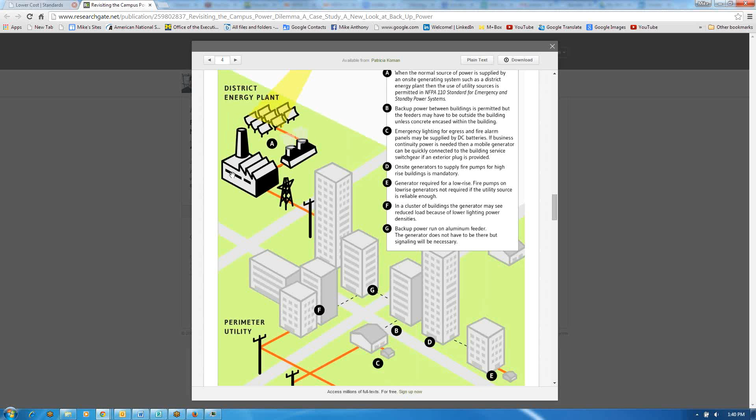Well, yeah, this is a drawing that we produced for the District Energy Association, and the point we try to make here is that when you have a district energy plant like this and you are identified by the authority having jurisdiction that this is your primary source of power and it's sufficiently reliable to be your primary source of power, and you find yourself nested within a utility, and I call it the perimeter utility here, you can use the perimeter utility as your backup source.

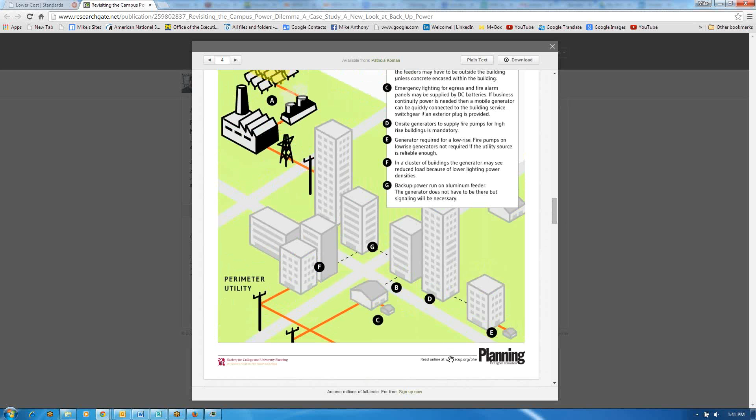Now, why is that important? That's one important point, because very often the 3 or 4 nines of availability is important for both of these power sources. But more importantly, what I'm driving at here is that here's a generator to a building. The feeders coming out of this generator could go to more buildings farther out.

We actually built one of these here in Ann Arbor. We have several thousand feet, 1,000 foot, 2,000 foot aluminum feeders. They're not normally used. They're 100 amp feeders, but we were able to consolidate power to 4 buildings with one generator here. One generator is feeding 4 buildings because using aluminum made it much cheaper.

In many cases, just getting the wire to the buildings is the prohibitive cost. This generator here is fairly well bid. It's a piece of equipment that's built off-site, and the optimal price has been fairly well discovered. What is not discovered is how much it's going to cost contractors to run feeders to all these places. So our solution has always been, let's just put a generator at every building.

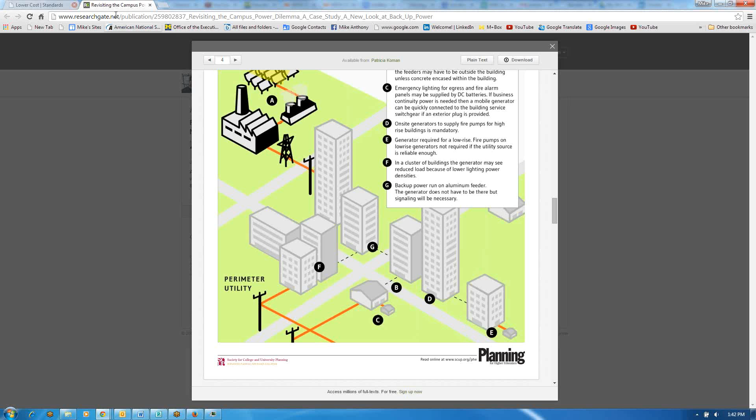So you wouldn't think the fact that aluminum feeders are 1/3 the cost of copper feeders would have an effect on greenhouse gases, but it does. It also reduces your ongoing maintenance and testing, because with generators you have to test them on a schedule. So now instead of having 4 or 5 different generators that you have to maintain and test, you have one.

Yeah. There is a condition. You're going to want your control wiring to be adequate. And there are some restrictions upon how you run your feeder through the building, but suffice to say that the cost of running power now to all these buildings that we showed you on our figure there is now 1/3 the cost.

So you can consolidate feeders. You can consolidate feeders to buildings, and so that's one of the unexpected benefits of the price difference of aluminum. So I wanted to bring that dimension in here, because it's not always known, and it is significant in an environment where we're all trying to reduce our greenhouse gases. So that's very cool.

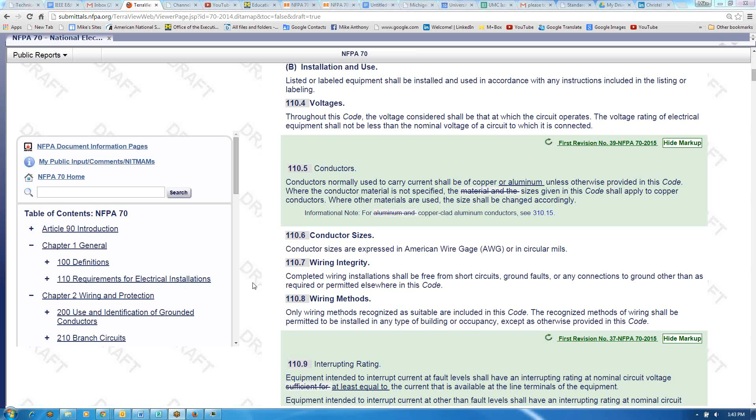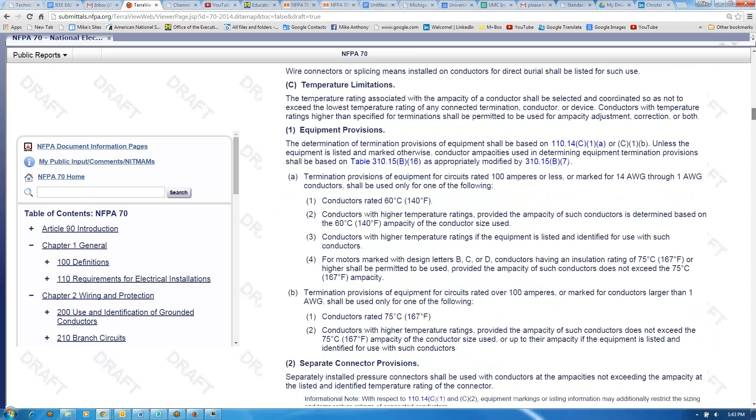Okay, so where should we travel to next, Christel? 110.14(D). So just a little bit farther along, and this will be our last one in Article 110. If you come down to the new D right there. Okay, this is another one that Pete Pollack actually started the ball rolling on.

The new 110.14(D) gives explicit instruction to code users that if you have a termination or a connection that has a stated torque value, then you will use a calibrated torque tool. We've talked about this for years, and the contention has always been that 110.3(B), which requires that you install equipment in accordance with its listing and labeling, would require you to use a torque tool in any case. But that's not the way it has been interpreted in the field.

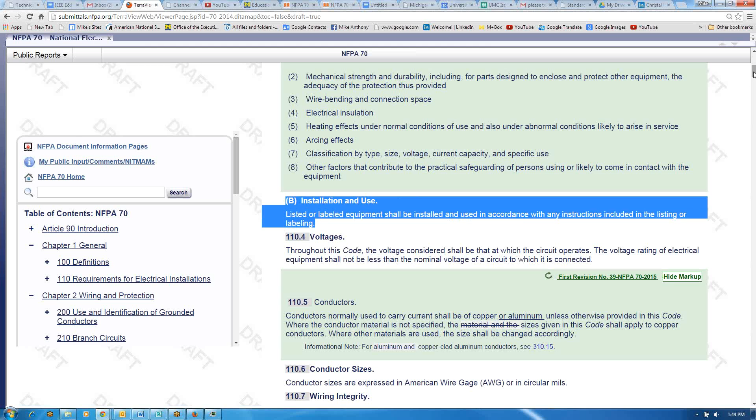So as code users, we know that 110.3(B) is right there. Very simple statement. If you've got a piece of equipment, you install it the way it's intended to be installed. But the normal electrician out in the field, when they read that language, they're not thinking about using a torque tool for, say, a set screw connection. So adding this language explicitly into 110.14 makes it very clear that if you have a torque value on a connection, you have to use a calibrated torque tool to make that connection.

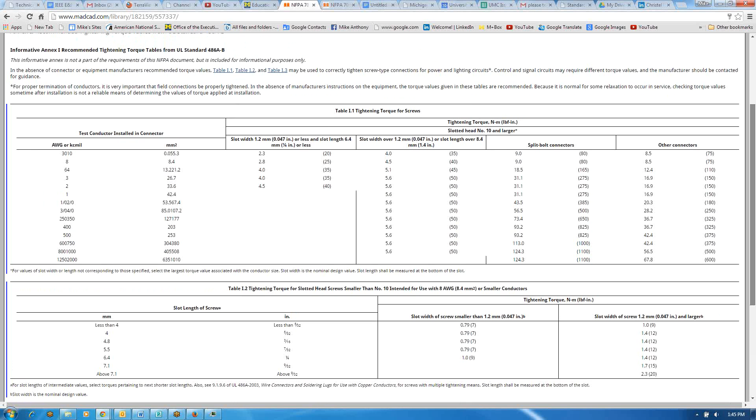And Mike, you've seen the testing that my colleagues and I have done over the last few years. We've gone to trade shows and all kinds of events with electricians, inspectors and some engineers. We did a field study to see how well electricians could terminate a connection without using a torque wrench. And the results were horrible. 1 in 4 got anywhere close, and we gave a wide range.

We gave plus or minus 20% of the recommended torque value, and only 1 in 4 could even get within that. The surprising thing to the electricians is that most of them were below the recommended torque value. 56% were below, and 30% of those connections were less than half of the recommended torque value. And I know from working with connector manufacturers that if you don't tighten that connection to the recommended torque, it will have a much shorter lifetime than intended.

So encouraging the culture of correct installation by using torque tools will decrease failures at connections, decrease overheated connections, and decrease fires over time once this begins to be enforced. And just real quick, there are some jurisdictions that already enforce this using 110.3(B), but they're few and far between.

So we're collecting case studies from those jurisdictions to find out how they enforce it, to kind of give options to other jurisdictions where this will be a new requirement.

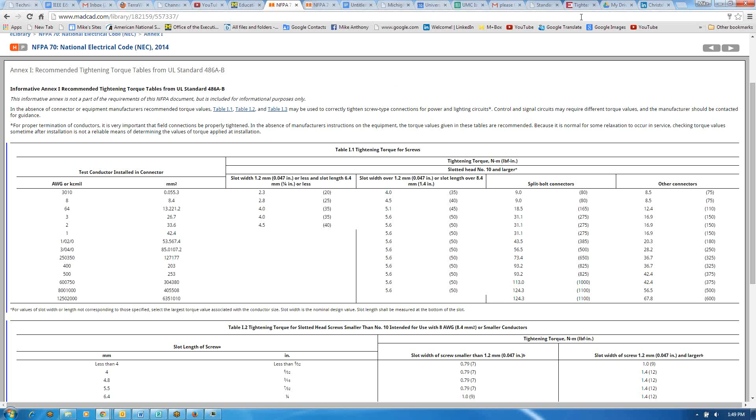Yeah, in places like the U of M Stadium, some of these buildings have tens of thousands. You figure every circuit has 2 ends, and you've got 3 phases, and you've got your ground, and you've got a neutral in there, so when you talk about tens of thousands of terminations that could likely fail like this, it's a fairly serious business. So, yeah.

Okay, let's get ourselves back to Terra. Where are we going to next? Let's go to 250.120(B). I love Article 250. It's better than Ambien. Let's see, what is it? 250 what? 120. 250.120.

I don't know. I sat in part of the Code Making Panel 5 meetings, and I found it fascinating. I think grounding and bonding, as much as it can be confusing, it's very intricate if you look at how the system parts interact. So. Oh yeah, but I'm a geek, so. I do get that. What I mean to say is, if it weren't so detailed, I would be bored. I sort of think all this is settled science, and it's always a surprise here that it actually isn't.

And for the record, Elliot, I always vote neutral, or I abstain from Elliot Rappaport's proposals to change globally everything from grounding to bonding as a professional courtesy. It usually doesn't go in his direction, but Elliot, we love you, and I never vote against you. I always abstain. Just for those of you who don't know, Elliot Rappaport's kind of like one of the unimpeachable experts in the grounding and bonding space, let's put it that way.

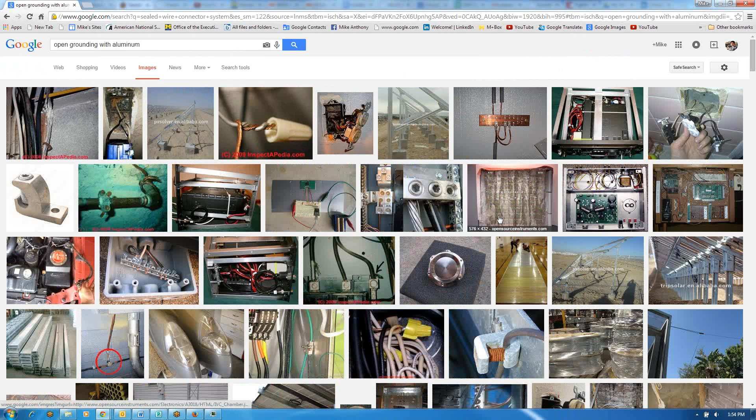Are there any pictures here that describe that? I'm looking for something and I'm struggling. Is something here? That's not exactly it. Can you see this? No. There are connections out there that have like a splice kit, and then they have like a gel covering that goes over it, but I don't see any on these photos. I probably have to send it to you. I know there are several companies that make them. I think 3M makes several. Can you give me another couple of search terms and we can look at that? Go look for 3M gel underground.

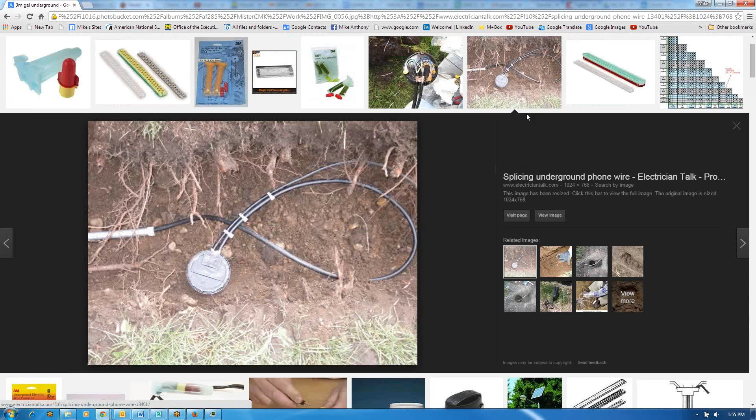So see the one that says Scotchcast. I can't really tell. Oh, there are several on here that might be, but basically you're going to see a connection, and then it has a cover. And here is a resin joint, low voltage armored cable. That's phone wire. Would you like me to search on? I'll try one more time. Okay. Resin wire. Give me another search term. Try 3M aluminum underground.

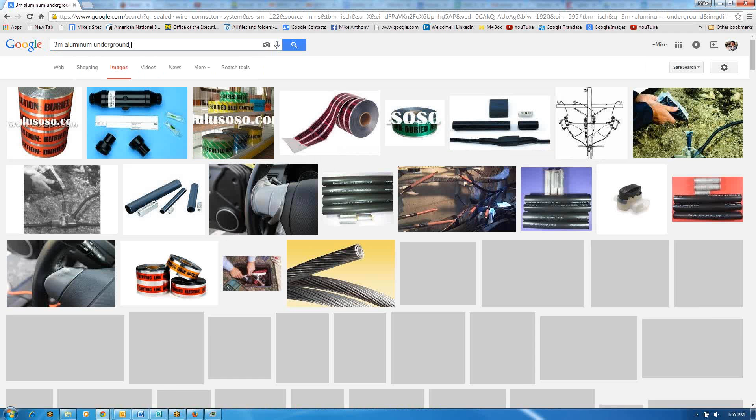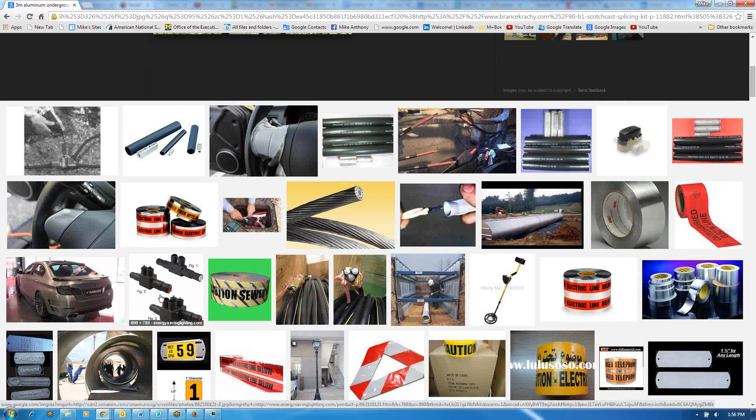Okay, see down there at the bottom, that's a good splicing kit, the picture you're showing now, and the row below that has one as well. Right here? Actually, see the second one over, actually there are quite a few here, I think that's one, it has like a shrink wrap, but I don't think that's gel. Oh, here you go. See where the car is? Go to the one right next to it.

I'm going to give you control of the... Okay, so you can give us a tour here. Yeah, it's kind of hard when we're in different rooms going, oh, that one. Okay, so you should be able to wiggle your mouse around and take us to the right picture. Come on.

It's not clicking on it for some reason. I can see my mouse moving, but I still don't have control. Let me try. Let me look again here. Crystal, I'm going to give us all control and try that. Okay. Go to the far right. Go to the far right. Can you do that there? No? Okay. Well, we may not be able to do that in this mode.

So regardless, I think we get your point. If you see where you see the car, and then there's some connections, and then there's a tape roll that says something sewer, the picture in between where it says Figure 1, Figure 2, and Figure 3 is a good example of an underground splice. Can you see my mouse running right now? No, but you see where the car is, the back of the car? It says, like, the license plate has come on or something like that. So we really are looking at a different screen here. Okay. All right, so we did our due diligence here to let everybody see what we're talking about.

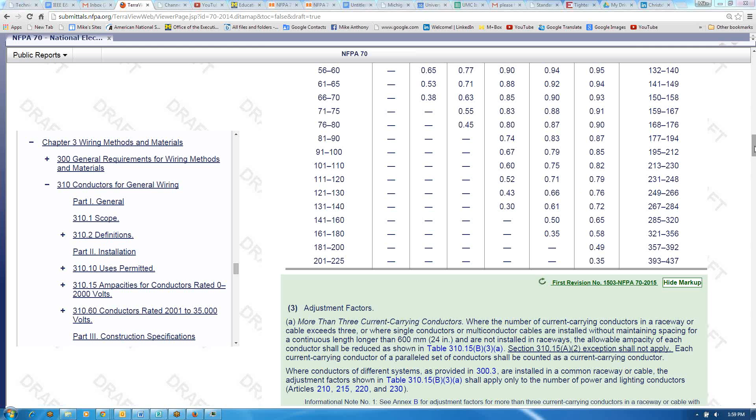So move up just a little bit so that we can see all of the green area. That's good right there. I'm going to unzoom this because I had it zoomed a bit. Okay. So we can come down a little bit. Here we go, right here. So if we look at C, right in the middle of the screen.

So what happened is there was a lot of controversy about the temperature adders for rooftop installations in the 2011 and 2014 code cycles. So Code Making Panel 6 requested an independent task group appointed by the correlating committee to evaluate the information that had been submitted before and come up with a recommendation for the code making panel, which they did. They enlisted the help of heat transfer specialists, professors at multiple universities. They included representatives from labor, from testing labs, engineering representatives, and the recommendation they came up with is that we actually don't need all of the rooftop adders that we have in 310.15(B)(3)(c).

If you look at the table where it says distance above roof to bottom of raceway or cable, what they found is that the only time you might need an adder is if the wiring method is in direct contact with the roof. So typically if you put a conduit system on a roof, you're going to use some kind of spacers, either blocks, pieces of wood, or manufactured supports from different manufacturers. So typically there's always going to be some space between the roof surface and the wiring method. And so the correlating committee recommended that we delete the table, and that the only time we have an adder is if the wiring method is in direct contact with the rooftop.

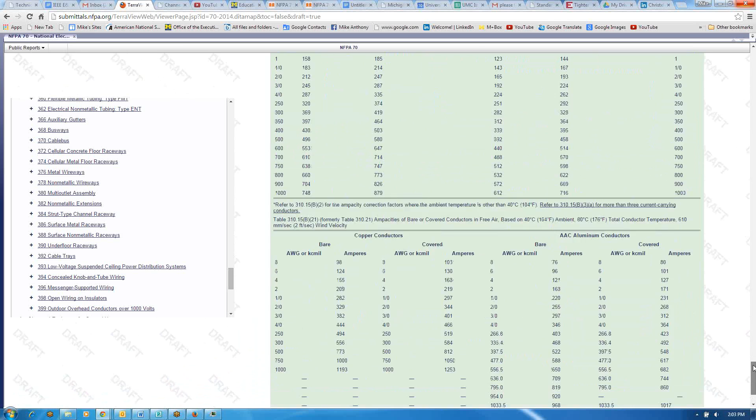I periodically put a proposal out there that we want to take all these numbers here. Where's my favorite table? I think it's 310.15. Right around in here. Those are the correction factors. So we have this table. It's B16. Is it 16 now? Yeah. You're looking for 310.15(B)(16). So come up just a little bit. You're on 21. There's 19. A little bit more. There you are. Right there.

Okay. So I never fail to try to get the committees to look. What it apparently looks like is I'm trying to drive 110 amps through a number 2, 195 amps through a 3/0, 260 amps through a 300. If it were only the copper, we can do it. It's only a 15% difference, but I think my industry has to hear it from an expert on the other parts of a power delivery system. Are you ready to talk about that, Crystal?

Sure. I am on Code Making Panel 6, and we did get your proposal to adjust those tables, basically adjust the conductors up one size or one value in ampacity. What the Code Making Panel decided is that without testing, without some showing that this is still safe, there's really no way to accept the proposal. Basically the panel wants to see testing from independent laboratories or independent sources that shows this is still going to be safe for all of the installations we anticipate these conductors being installed in the field.

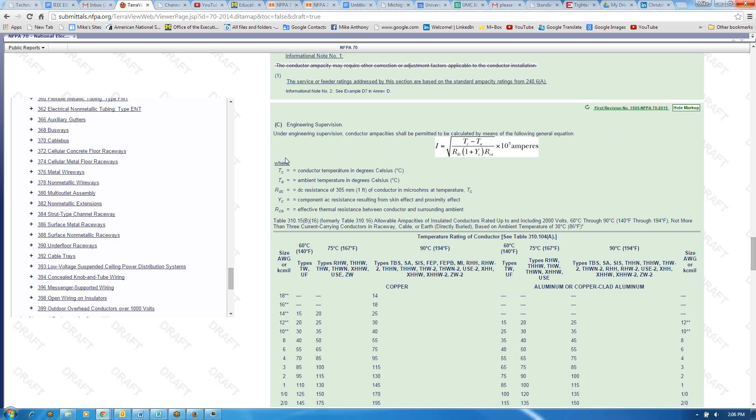I'm often taking my inspiration from the European electrical designers. They tend to custom engineer their material a lot more. And we also have to remember that you always have a default table. You don't have to use this. You can use this, where's our Neher-McGrath? Here we go. You can use this. They almost never do. When a contractor is bidding a smaller job, maybe there's not a lot of difference. But in the case of, say, a 400 amp feeder, if I wanted to drive 420 amps through a 600,

there's two parts to the problem. One of the problems is did he calculate this number correctly? I'm working this on many fronts, but my thinking here is we probably could take 10-15% out of this, which is generally what the difference is.

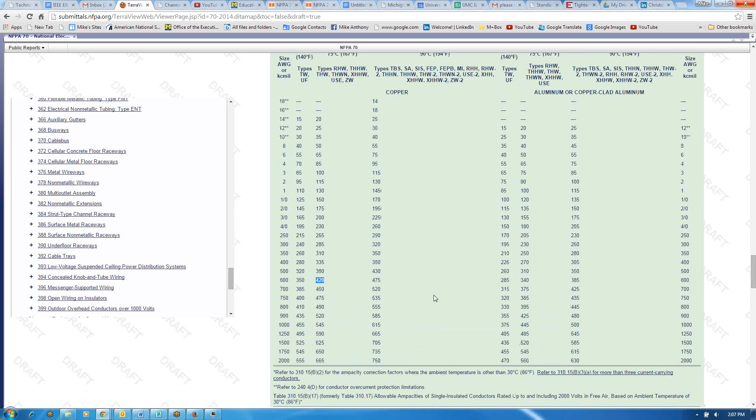But I was thinking, you might say something a little bit about the termination temperatures. We have to coordinate the temperature classes of our terminating equipment and our insulation. Yeah, we do, and that's a big consideration. That's been a huge topic of discussion in the Canadian Electrical Code process, and it's always an issue to consider in the NEC.

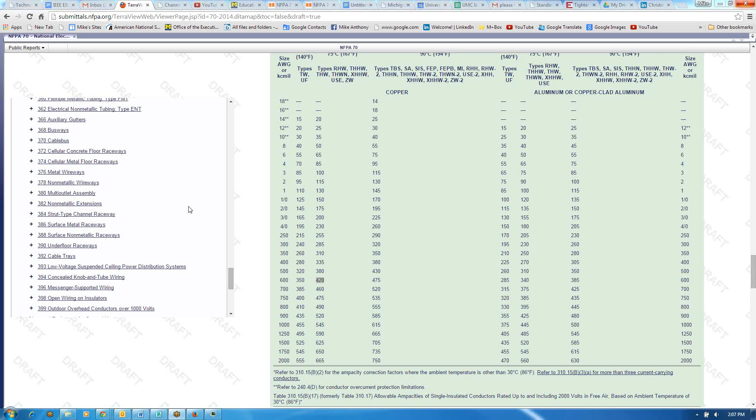If you look at the way switchboards and panelboards and any of what we call temperature-sensitive equipment is tested, the manufacturers take the conductor size out of the 75 degree C column that matches up to the expected load on a rating of the equipment, and they test it for temperature rise at those terminations. So the larger the conductor, the better the result is.

So if you tested a piece of equipment with 4/0 and you got the appropriate temperature rise, but then you only installed a 2/0, there's a good chance that termination will overheat if that equipment is loaded to the rating that it's been given. So you always have to look at the terminations before you make any changes to the ampacity allowances for conductors.

Yeah, I acknowledge that this may well be not intractable, but a very difficult infrastructure topic. It would be like saying, well, let's start riding on the left side of the road. That may not be cost effective given all the other alternatives you have. So I don't doubt that, but I don't want the NEC committees to think that I'm not challenging them a little bit.

That's true, and there's always the possibility of going back and challenging the original ampacities. There was a presentation to Code Making Panel 6 from the Correlating Committee Task Group that looked at the rooftop issue, and they went back and found the history of our ampacities, and the numbers we used were actually determined, I think, in the 1940s, and it was based on testing, but also with a healthy